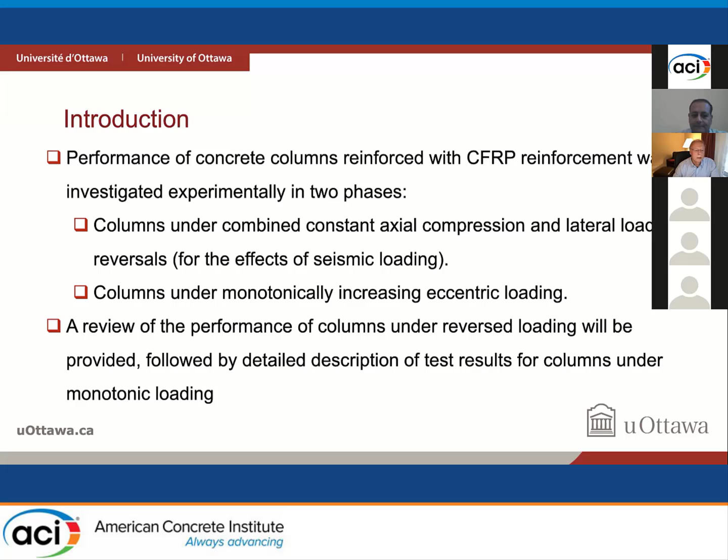The first phase involved seismic research, and it included 12 square columns having 355 millimeters square cross sections. We used Pultrall CFRP bars, either 8-bar arrangement or 12-bar arrangement, with different transverse reinforcement arrangements. Some of the bars were placed in the corners of NEFMAC grids that we used as transverse reinforcement, and others were only limited to the corners of the column, and I will show you pictures of that.

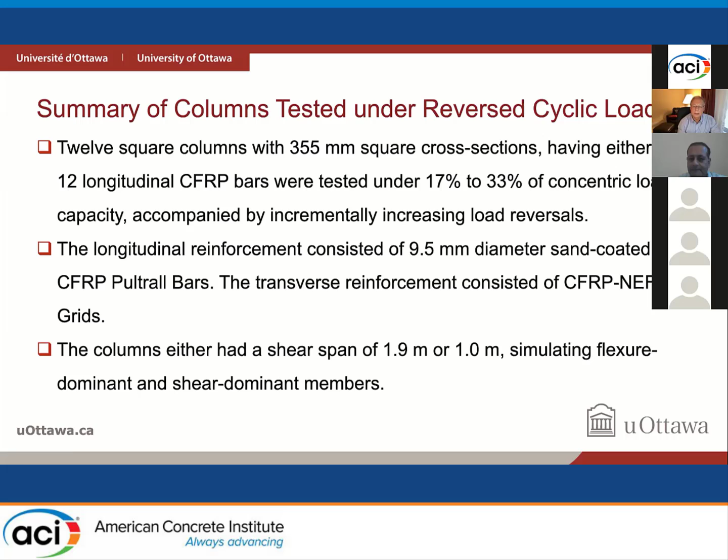The longitudinal reinforcement consisted of 9.5 millimeter diameter sand-coated CFRP Pultrall bar. Sand coating was meant to help the bond, and NEFMAC grids had different number of cells, as you will see, and we tested either 2-meter long flexure dominant columns or 1-meter long shear dominant columns. They were subjected to different levels of constant axial compression and accompanied by transverse load reversals.

So here you can see the construction stages of specimens with different shear spans and also cross-sectional dimensions. As you can see, we either had 8-bar arrangements or 12-bar arrangements using CFRP Pultrall bars, and then subjected them to constant axial compression and lateral load reversals.

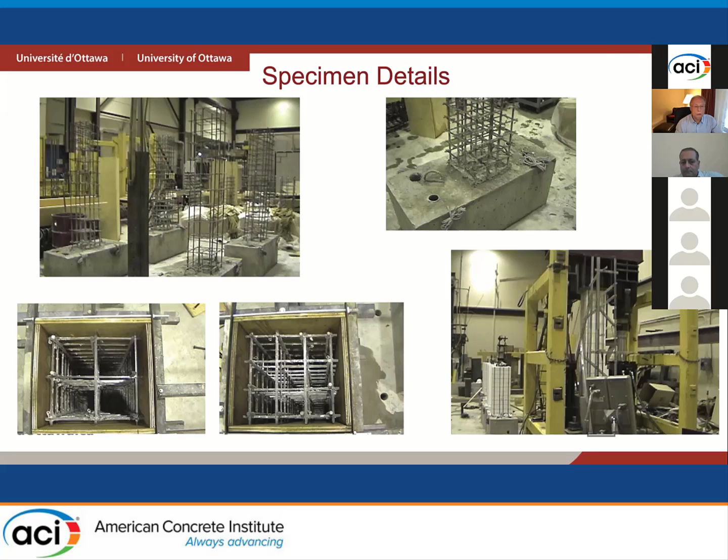In terms of failure and in terms of material behavior, we obviously did a lot of coupon tests, and our coupon tests agreed with what was specified by the manufacturer, and we went up to approximately 1,500 megapascals of tensile strength. In the second phase, when we tested columns under monotonically increasing load, we used Japanese bars, LeadLine bars, in which case we went up to 2,500 MPa.

Here on this diagram, you see stress-strain relationships in tension and in compression. In tension, we went all the way up to the rupturing strain, and in compression, we were able to buckle the reinforcement. Tensile tests were conducted as we typically do with ends embedded in steel tubes with sufficient bond length to be able to break the specimens. For the compression tests, we have taken smaller samples and basically crushed them in the machine, and we were able to see the kind of buckling that was observed in our column tests.

As you can see on the right-hand side, a couple of the columns failed due to compression, buckling of reinforcement, but this was not the same as the type of buckling we observe in steel reinforcement. There was no bending in the bars, but it was basically buckling of the fibers. And after buckling, the failure looks as if it was cut at that location, at the critical location.

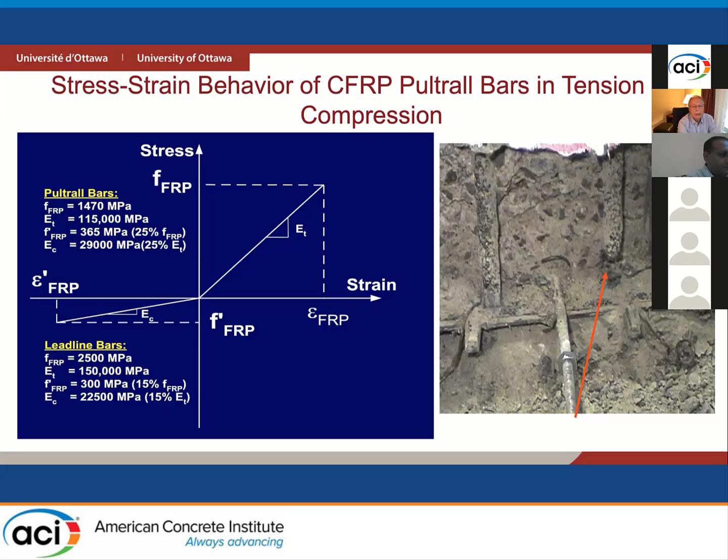When we did analysis for validation, we used 25% of tensile capacity and 25% of modulus of elasticity as compression values in the case of Pultrall bars, and 15% in the case of LeadLine bars, and we did obtain fairly good correlation. If we look at test data, I have reproduced only two hysteretic behaviors.

We were able to get some deformability. We went up to 2% without any strength decay, and at 2% concrete started crushing. And then gradually we started observing strength decay, but it is noteworthy that the unloading branches were passing almost through the origin, which indicates obviously that they remained elastic. So this was the restoring capability of FRP that we observed.

If we look at the next hysteretic response, which is under 12-bar arrangements, we had similar behavior, and our conclusion from these reverse cyclic loading tests was that we were able to introduce some level of ductility and reasonable deformability, going up to 2% drift, by essentially gradually crushing confined concrete rather than reaching the limits of the material.

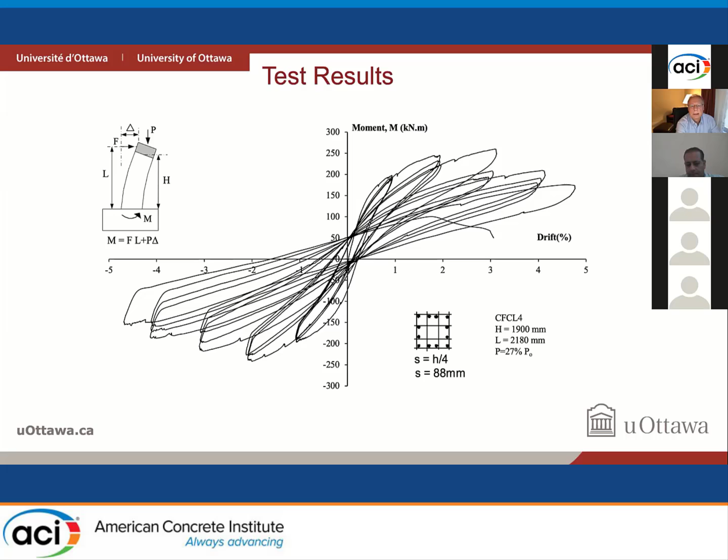On the compression side, we were able to attain about 0.8% strain before bars buckled, and on the tension side, we were able to go up to 1% strain. So what was interesting was the observation that bars were able to develop significant compression strain, which was compatible with crushing of concrete, even though in our current CSA S806 standard, we disallow compression capacity of reinforcement when we design columns with CFRP bars.

Now let's look at column tests under eccentric loading. We tested a total of 5 columns; they were approximately 1.7 meters in height, and they were tested under a universal testing machine. The objective was to see behavior of these bars in compression under different levels of eccentricity, and also to see if we can use the strain compatibility analysis that we always use for sectional analysis for steel reinforced concrete columns, and see if the same analytical techniques are applicable to those columns

reinforced with CFRP bars. And also, more importantly, develop column interaction diagrams for FRP reinforced columns, where, of course, the concept of yielding of reinforcement does not exist. And I will show you the correlation between interaction diagrams and the test results as well. The concrete strength on the day of testing was 55 MPa, and percentage of reinforcement was 0.36 when we used 4-bar arrangements, and it was twice the amount when we used 8-bar arrangement with eccentricities either 60 or 75 millimeters.

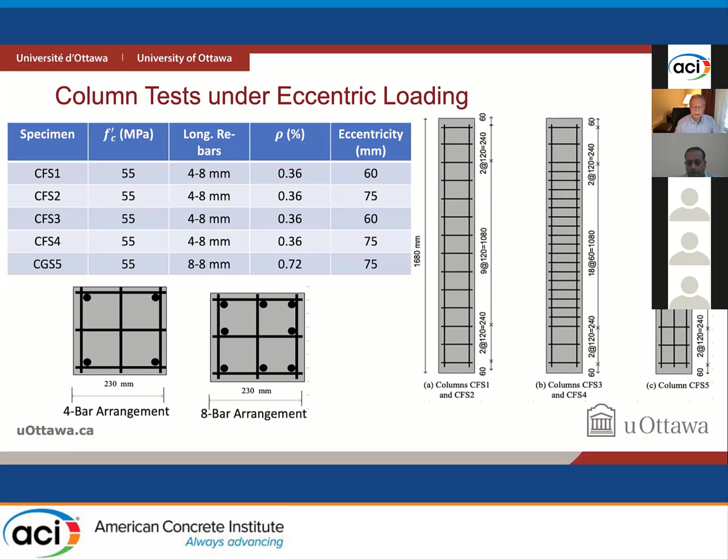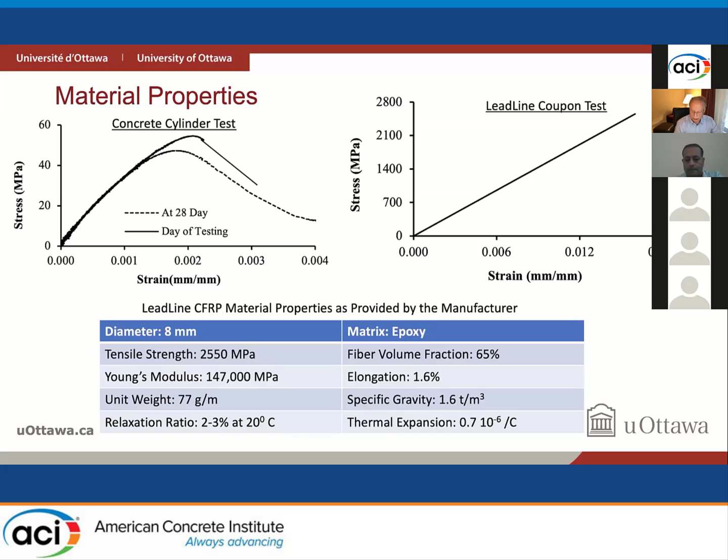Here you see stress-strain relationships for concrete. These are cylinder tests. So it's almost approaching high-strength concrete, which is obviously compatible with high-strength reinforcement in this case. And then LeadLine coupon tests can be seen having over 2000 MPa capacity. And the table shows what was supplied by the manufacturer, which was verified by our coupon tests. In terms of transverse reinforcement, we used NEFMAC grids. These grids had square or rectangular cross-section, 6 millimeters by 8 millimeters. And then we either had 4-cell grids or 6-cell grids.

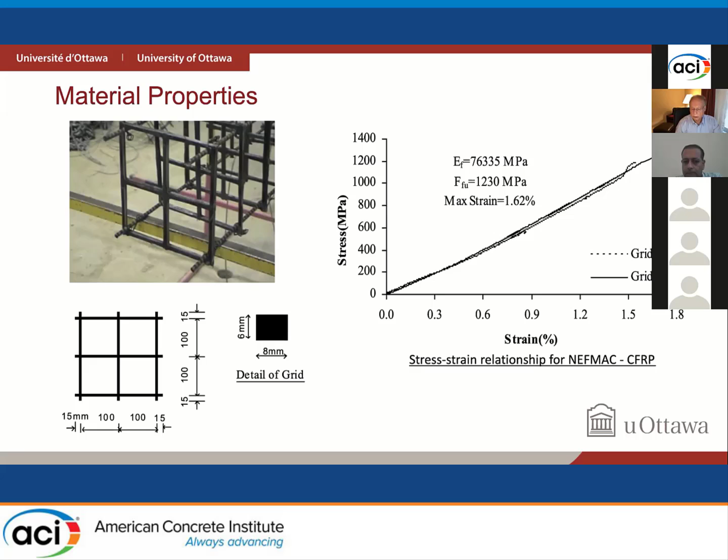And we then used either 4-bar arrangements or 8-bar longitudinal bar arrangements with the dimensions that you see on the slide. The stress-strain relationship of NEFMAC CFRP reinforcement went all the way up to 1200 MPa. However, one has to understand that the critical point in these grids were the corners. In this research, we did not observe any transverse reinforcement failure. However, in another companion research where we tested grids with longitudinal steel reinforcement, the corners started failing at about 700 MPa. So this 1200 MPa should not mislead you. That's the material capacity, but not necessarily lateral load capacity when it comes to restraining longitudinal reinforcement against buckling or confining concrete columns.

This is our test setup, and the ends of the columns were externally confined because this was not the test region. Typical failure is, as you can see on the right-hand side, and the failure initiated with crushing of concrete followed by buckling of compression reinforcement. In 2 of the columns, we did observe tension failure in the bars, only after buckling occurred on the compression side, and tension failure was in the form of rupturing of fibers, whereas compression failure was, as I have shown you earlier, buckling of fibers rather than buckling of rebars.

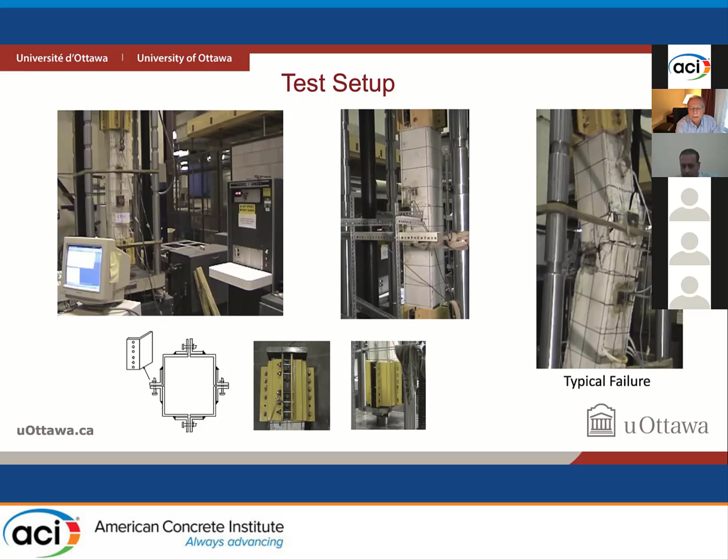These diagrams summarize test results. Here you see on the left-hand side, moment versus mid-height deflection. And obviously, as you increase eccentricity, moments increase at a faster rate. And also, the solid line without the data points is for the 8-bar arrangement, where we had twice as many bars, and hence it was stiffer than the companion column having the same 75 millimeter eccentricity. So there was nothing new about the moment mid-height deflection relationships, except we did reproduce these analytically using the conventional mechanics procedures, using sectional analysis, strain compatibility analysis, and integrating curvatures and getting displacements. So there was a good correlation in results.

What I would like to emphasize is the measured strains in longitudinal reinforcement that you see on the right-hand side. Strain gauges were placed on extreme tension and extreme compression reinforcement. As you can see on the left-hand side, we were able to go up to about 0.3% strain, and sometimes we exceeded that, and the bars started bending and buckling at about 0.4%. So this is compatible with what we take in our design calculations in Canada as 0.35% strain, and in the US 0.3% strain, which means even though we disallow contribution of FRP reinforcement for design purposes, they do maintain their integrity well after concrete crushing. On the right-hand side, we observed tensile behavior, and once again, we did get significant strains in tension.

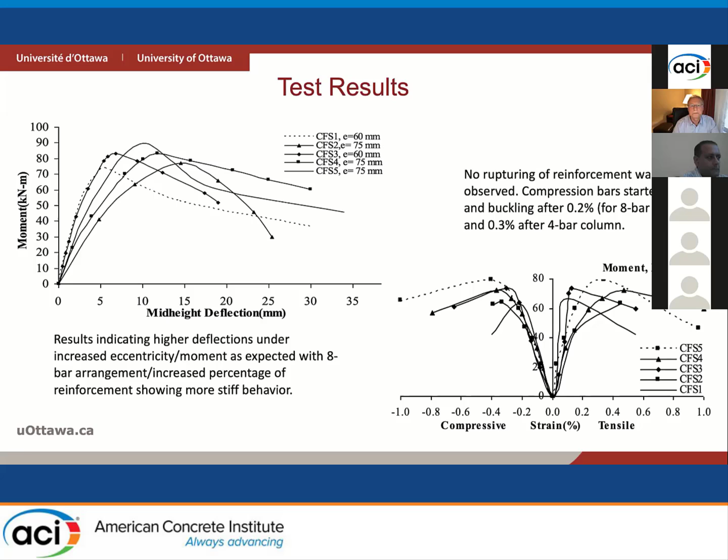Next, I'd like to show you the interaction diagrams. These interaction diagrams were plotted either using unconfined concrete, in which case we used Hognestad's model, and analytically generated axial load moment interaction diagram. And obviously, the concept of balance section and tension behavior is different than that we deal with in steel reinforced columns.

Our failure envelope was defined by either crushing of concrete or rupturing of FRP. As I said, in our test, we did not observe rupturing of FRP, but these interaction diagrams were plotted for that condition. And these are nominal interaction diagrams. And obviously, we have to use a phi factor and reduce the capacity by 25% to get design capacity. So design capacities will be well inside of these curves.

And the confined concrete model was used to generate confined interaction diagrams, in which case the crushing of concrete was taken from the moment curvature relationship as the maximum crushing point on the interaction diagram, rather than assuming a strain value. Whereas for unconfined concrete interaction diagrams, we basically used epsilon CU of 0.0035 as per the Canadian standard.

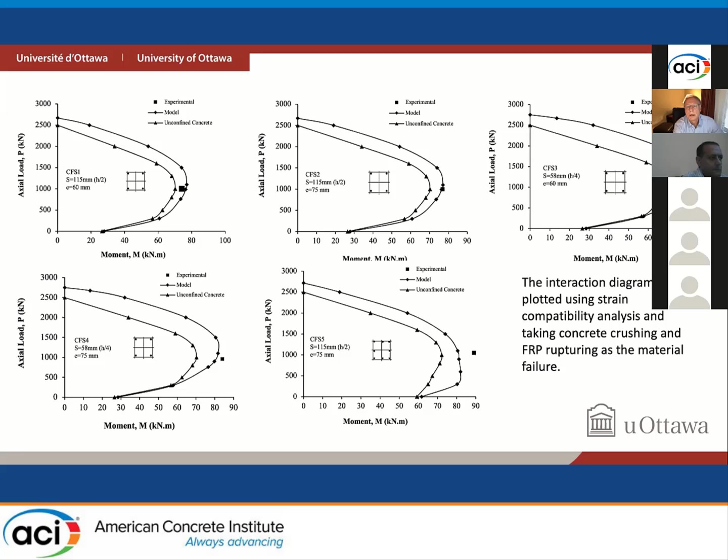As you can see, the experimental points are indicated by solid square points, and they are at or near confined interaction diagrams, because these columns were mostly confined columns because the spacing of transverse reinforcement was either h/2 or h/4. So with this, I'd like to give a number of conclusions.

Conclusion number one would be FRP reinforcement can be used in columns, in tension and in compression. Unlike the initial doubts, bars remain intact until after concrete crushes, even though because of the low percentage of FRP reinforcement, if you were to calculate contribution of compression reinforcement, that would not be that significant.

But in terms of seismic behavior, because they maintain their integrity in compression, they are able to sustain stresses under load reversals. So when you reverse load in phase one, we observed this. Bars that were subjected to compression, when they were called upon taking tension, they were able to sustain same level of tensile stresses that we observed under monotonically increasing load.